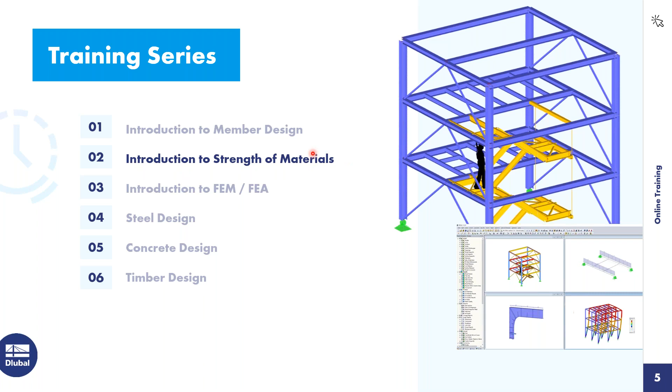Our training series consists of 6 different topics. Today we have the second part, the introduction to the strength of materials. What can you expect today? First of all, you will get an introduction to RSECTION.

RSECTION is our cross-section standalone program for the creation and calculation of user-defined and any different cross-section and profiles. You can calculate thin wall profiles and also massive profiles. This is a huge advantage, that you need only one cross-section program in order to calculate various and different profiles and cross-sections, it doesn't matter if they are thin-walled or massive cross-sections.

Then we do together a kind of introductory example. We will model together a thin-walled I profile, and there we also see the calculated cross-section properties. We will also do a kind of cross-section classification and also apply some loads in order to see different results like bending, stresses, and so on.

Then I will forward later on to Bastian. He will do the 3 other examples, also on a thin walled profile, then also a massive cross-section according to the FE analysis, and then also a hybrid cross-section.

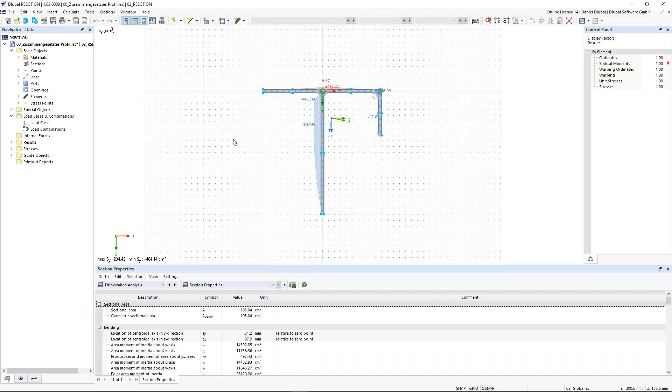With RSECTION, you can calculate all possible cross-section properties like sectional area, area moment of inertia, shear moments, statical moments, and so on. You can also get the centroid and so on. Moreover, you can perform cross-section classifications, and you can also consider effective cross-sections or effective widths of thin-walled cross sections. So: cross-section properties, cross-section classifications, and last but not least, you can also perform stress analysis or stress proofs. Okay, so much to RSECTION.

Now I will explain a little bit about the user interface. On the top, you find the menu bar. Similar to RFEM, you can create here the file menu, a new model, you can save it, you can print, you can create the printout report, you can import some DXF files. So when you're working, for example, with AutoCAD, you can import it. You can edit some objects, manipulate them, adjust them, edit them, and so on.

You also have the possibility to set some views like the console, script manager, tables, and so on. You can insert different and various kinds of objects like nodes, points, lines, parts, and so on. Also calculate tools - tools is a quite important part here in RSECTION, because we will use these two commands: create angled corner, create round corner.

These are pretty important. On top of that, the classical options - when I go here to program options, and since we are today an international group of students, you have always the possibility to change the language you would like to have. So when you are from Spain or you are a Spanish speaker, you can change the language to Spanish, for example. And you can also change the display properties.

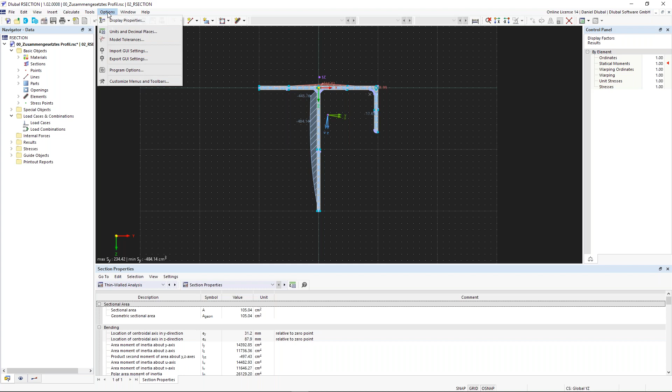So when you want to work in a black background, you can change it here to load dark background. And I click on OK, and then you have this black background or dark background. But I prefer the white background, so I will change it back to white background, and so on. Okay, so much to the menu bar.

Then we have also the symbol bar. It's a fast access to the most important functions and commands, like the creation of lines or points or also new elements. Then we have here the navigator on the left side.

The navigator is divided into 3 parts: we have the data navigator, we have the display navigator, and when we have results, then we also have the result navigator. The first navigator is the data navigator. This navigator is a kind of organization of all model objects, model data, also internal forces, results, load cases, and combinations.

You can create different objects per dialog, like a point - you go here to new point, or you can also edit them. It is structured in a kind of tree structure, so when I open this arrow, all existing points appear there, and this makes it quite easy to see which kind of points, in this case, you have already modeled. Okay, so much to the data navigator.

When you have, for example, some blue objects, that happens because the object or material isn't assigned to any other object. And when you have a red object, it means there's a false definition of this object, for example. But you will see it later, or maybe also at Bastian's examples.

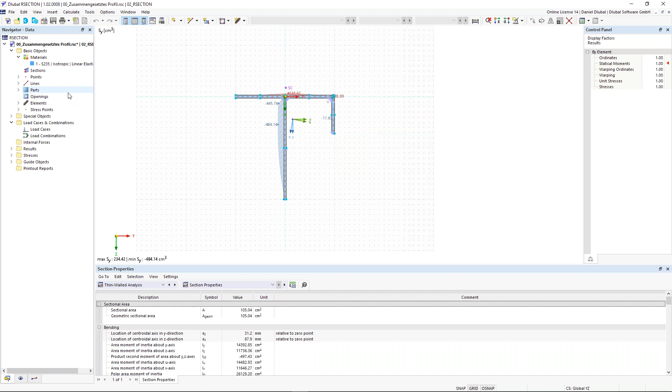Okay, the next navigator is the display navigator. Similar to RFEM 6, I can hide or activate different display properties. For example, I would like to activate the numbering, so I see here the numbering of points, lines, and so on. I can hide the results, I can activate them, also the points, and so on.

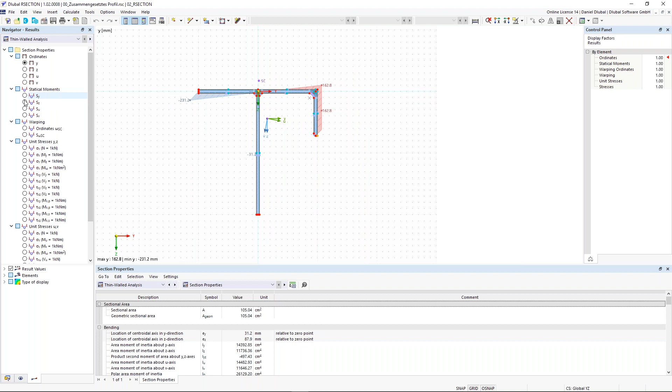And the last navigator is the result navigator. Here I can access the results graphically. In this case, I want to show the statical moments, for example. I activate them by clicking on them, and I see it here at the working area. Here, the statical moment - I have various options to control the display of these results.

I can say the type of display should be ISO bands, ISO lines, or just an easy distribution of this result. I can also say, okay, I will tilt this thing, without diagram, two colored, and so on. I have here various options regarding the display option of these results.

Here in this upper part of the result navigator, I can also activate the unit stresses and so on. And then here we have also the tables.

The tables are also very important because here we can also control and access all basic objects. So we have here an overview similar to the data navigator. We can also create and edit here in the tables different objects and also the load cases and so on.

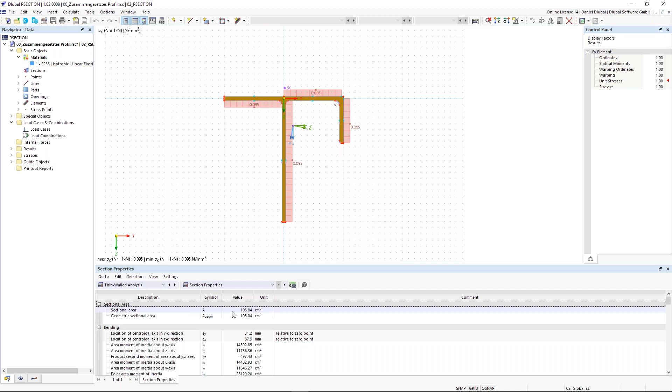And we can see here the results of the analysis of this section. So we see here, for example, the sectional area, so square centimeter 105, then also some other cross-section properties like the bending, so the centroid relative to the 0 point. 0 point is here, and also kind of area moment of inertia and so on.

Okay, so this was, I would say, the rough introduction to RSECTION and its user interface. Now I hope that you paid attention because I have prepared a poll for you.

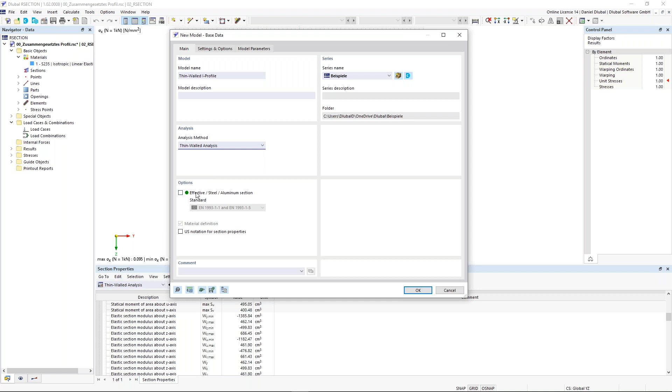The option effective section I don't activate for the first. At first, we will activate this afterwards, and I will explain you also afterwards what it means when I have activated this effective section. So then I click on OK.

And I will do a very easy I profile. It's an IPE 300, but for easier things, I will neglect the radius, so we don't do a kind of roll section. We will do this later on. So at first, we create here a kind of new element.

This element is also used for the cross classification later on. I will use here a new material. For those who don't have here a material, no problem. You can create here a new material. Just click here on create new material.

And a new window appears with a kind of new material dialog. And there you have the possibility to open the material library, and you can search for the steel S355. Then you have the possibility to choose one of these things. I will decide here for this Eurocode, European Union S355, and I click on OK.

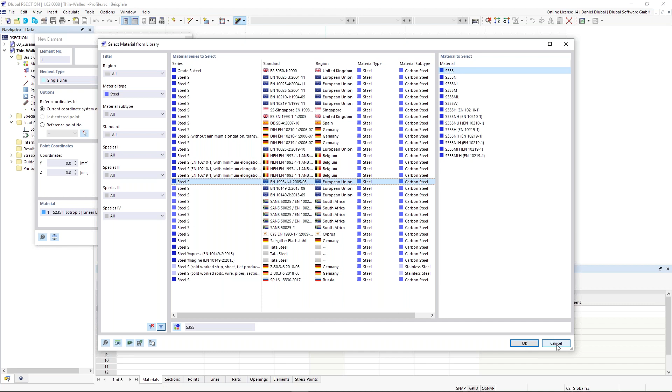But I have already done this before, so I click here on cancel, but you should click here on OK. Then this material will appear here. Okay, for our example, I will use here this S355. And now we do the first element of this I-profile, and in this case, the bottom flange. So this has a length of, let me check, 150 millimeters and a thickness of 10.7 millimeters.

And I will create it here at the 0 point local coordinate system. I click here on OK. And then we create the web.

The web has a length of 289.3 millimeters and a thickness of 7.1 millimeters. And the angle in the work plane is 90 degrees. Now I change the orientation, so I can snap here the middle point of this element. I click on OK. And now I do the same for the upper flange.

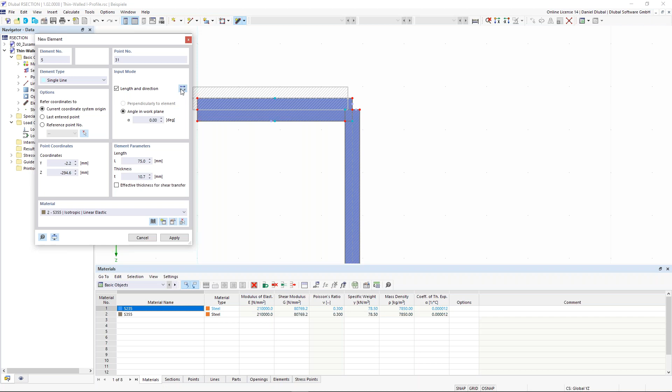Again, here I have a length of 75 millimeters, thickness of 10.7 millimeters, and direction is here. And then I change again the orientation. And now I have here my cross section.

So I have here my cross section, and yeah, the next thing is just calculating it, and then let's take a look together on the results. So for the calculation of this cross section, I go here to calculate, say calculate all, and I see here

the cross section properties. First of all, the ordinates, the y, z ordinates. I can see them here as colored results. For me, it's interesting to see the cross-section properties. In this case, the sectional area. I have here this one, 51 square centimeter.

Then I scroll a little bit down to the other results. I see here the centroid, so relative to the 0 point, the 0 point is here. And as you can see, okay, the y coordinate is 75 millimeters because we have here this I-profile, which is symmetric in both directions.

Okay, good. Yeah, and then we have also all other results like the statical moment. We have the elastic section module about the strong and the weak axis. This is important for the calculation, maybe for the bending capacity of different steel profiles. Then we have also here some information about shear, so the shear area.

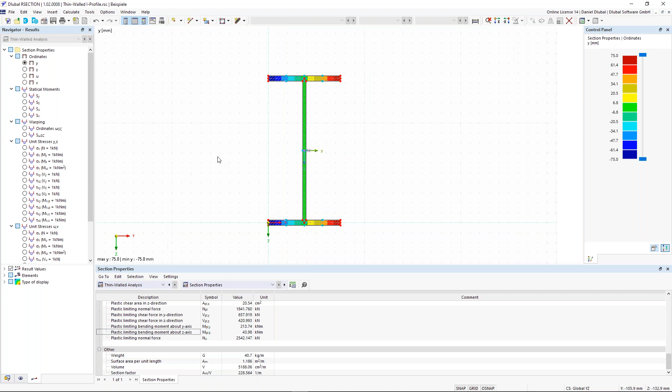So the plastic section modules about the y-axis, and also here this plastic limiting bending moment about the y-axis and also the z-axis. And also important for you, the self weight, so per meter, also pretty interesting to see it, and so on. So what can be also pretty interesting, the statical moments of that.

This kind of display isn't so good, so I would put here this one, and maybe in order to have it similar like your hand calculation, I would activate here this tilting of result diagrams, and then you see it here like that. You see also here this shear distribution with the arrows. For a kind of better display of the results, you can also deactivate here the parts and also the elements, and then you see the results a little bit better. It's up to you how you would like to do that.

And yeah, this was a very easy and general example. When you do some hand calculations yourself for your study, or have some easy examples, you can always refer to RSECTION. There you can enter and create this cross-section, and then compare the results to your hand calculations.

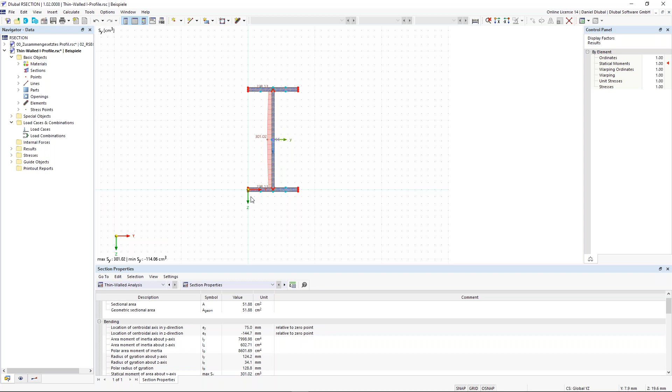If the cross-section properties are the same as in your hand calculation, okay. Now we will edit this cross-section a little bit, so I will deactivate the results here, and now imagine that we do this cross-section. This upper part is like a T-profile, a rolled cross-section, so we need a radius here, and the bottom flange we would like to weld onto the web. So we will add some weldings, some fillet weldings.

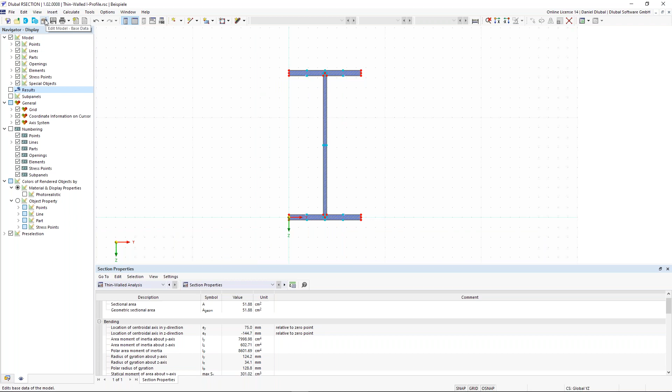Let's start with the cross classification, because now I want to consider cross-section classification for a steel profile according to Eurocode 3. Eurocode 3 has 4 different cross-section classes, and we can also do this classification with RSECTION. I go to the base data and activate the option effective steel aluminum section. This allows me to perform a cross-section classification, so I will see which elements or C parts are responsible for that cross-section class. This is pretty interesting, and I will activate it.

The next thing is that we will show the sub panels, and as you can see, these sub panels are the C elements for doing this cross-section classification. You can do this also by hand, but RSECTION considers it automatically. This is important for performing the cross-section classification.

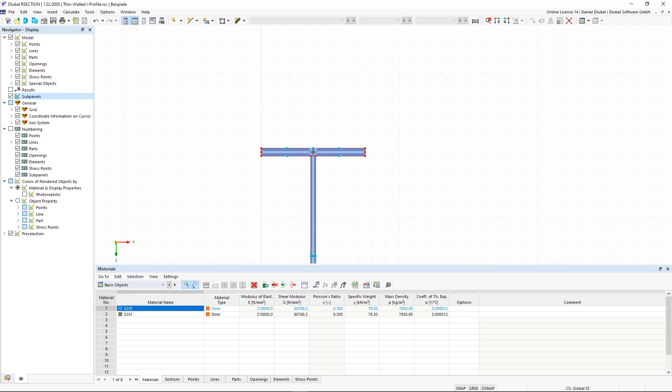Now we will add here these radius. So therefore we go to tools, and I will create a round corner. I go to the round corner and enter a value of 15 millimeters. I choose this line and this line, and then you can also see that the sub panels are fitted to the outer points of this radius.

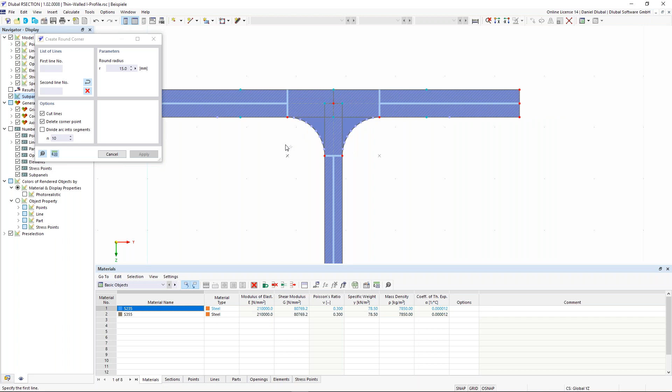Let's do the same for the right side, and you can see how they change depending on the end of this radius, because this will affect also the cross-section classification. So right click, I will end this dialog.

Now we will do the next part. Here we will add an angled corner. So I go again to tools, create angled corner. And now I choose here the corner type edge and angle, and I can insert here also a kind of formula.

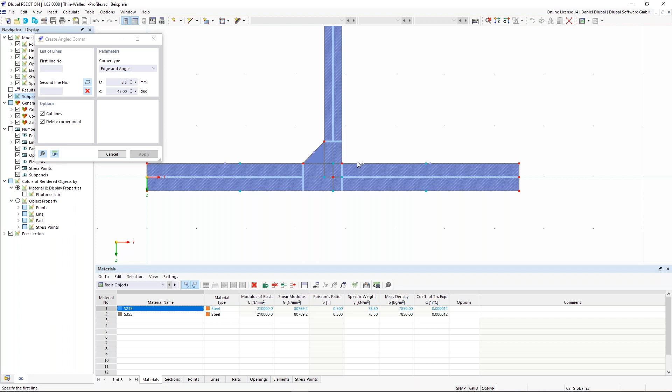The edge length should be 6 millimeters times the square root of 2, because we will consider a degree of 45 degrees. So I enter SQRT for square root with braces, and in the braces I put 2, then jump to the next box and the length is calculated automatically. And the degree is 45 degrees. Then I choose both lines, this one and this one, and again you see the sub panels are changed. We do this on the right side too.

So much to that. Now, in order to perform this cross-section classification, you will also need some internal forces, normal forces, bending moments, because then the cross-section classification is complete.

So I go to the data navigator, and you can see here I have the possibility to create load cases and also to add internal forces to the load cases. Let's do that. I will create 2 load cases, so I click right click, new load case. The first load case should consider only normal forces.

So I enter here only N for normal forces. I copy the whole thing, and here only bending moments. Then I jump to the next register, the load combination, and there I create a load combination where all load cases are considered in one bigger load case, but only with these kind of factors. This is completely fine, and I click OK.

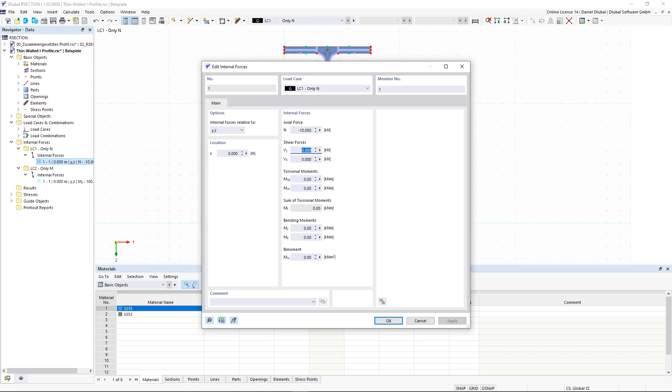Some of your exam tasks require stress nodes at a specific location. Normally in our section a lot of different nodes or points are given, these are so-called stress points. Here you can see different values or results for the stress at that location. When you want a result at a specific location, you can also add user-defined stress points.

This can be done at stress points in the data navigator. Right click and say new stress point. To find our stress point fast, I give it point number 100, and refer the y coordinate to the middle point of this bottom flank, and the z coordinate should be minus 100 millimeter, minus because we go against the global z coordinate. I click OK, and here's our stress point number 100. Perfect, so much to that.

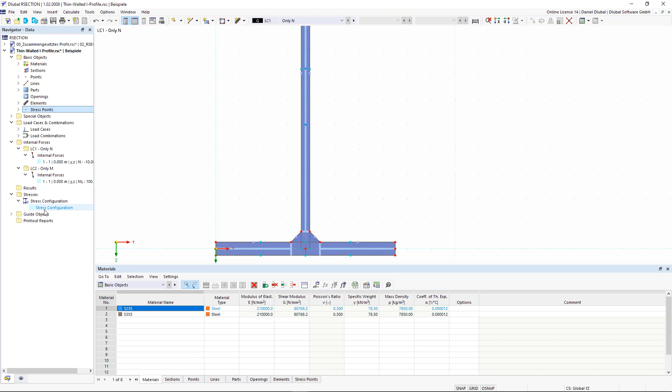Now let's go to stresses. You have the possibility, when considering stress analysis, to adjust your stress configuration. Just right click or double click and go to edit, and then you can activate various stress types, like normal stress due to axial force, both tensile and compressive, or for bending around the local y-axis.

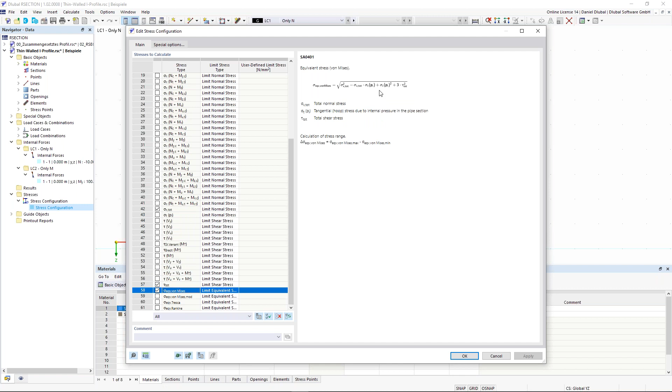In standard cases, 3 stress types are already activated: the total normal stress according to this formula, the limit shear stress, and the equivalent stresses according to Mises or von Mises. I will leave it like that, you can adjust it on your own needs. I click on OK.

The only thing we have to do now is go to the menu bar, calculate, click on calculate all, and then go through the results. First of all, I see this thin wall analysis, and because we activated before in the base data the option with the effective thin wall analysis, we see this other analysis too. This normal thin wall analysis is suited for easy cross-section properties.

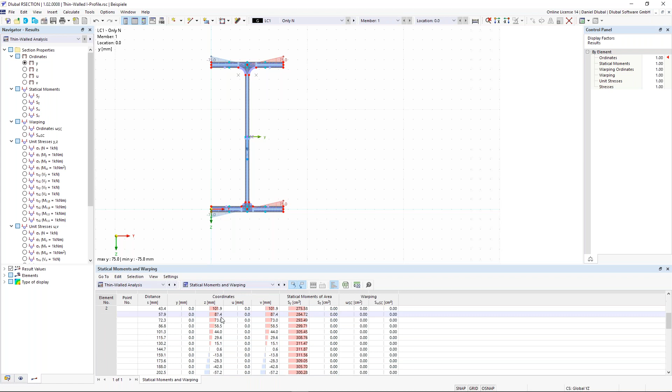So I go again to the thin wall analysis, and I can see the section properties, the statical moments, also unit stresses, and the normal stresses. Then you see here also the stress ratio according to the selected load cases and load combination.

This is also pretty interesting, here the different stress type. When we are interested in the stress ratio for our set stress point, I go to stresses by stress point. I click on our stress point, and now you see the stress ratio for our user-defined stress point. So much to the thin walled analysis.

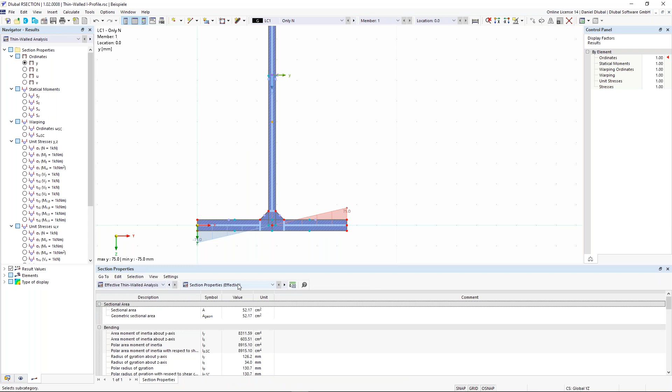Now let's jump to the effective thin walled analysis. Now it becomes interesting because you can see we have a sectional area of 52, and also that we have an empty part of this section, because now the program considers, according to the cross-section classification, only the effective section properties. So there we have a part which isn't effective, and this is also not considered in the whole calculation of the section properties.

Okay, now let's go to the section classification. This is pretty important when doing cross-section classification according to Eurocode 3 with steel profiles. Here you see we have class 4. Why do we have class 4?

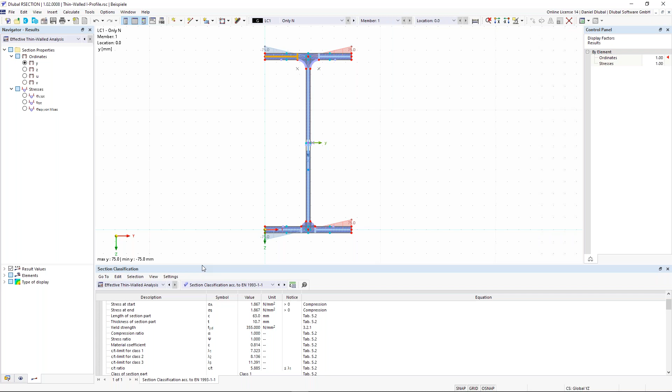Because every subpanel is analyzed by its own classification or cross-section class. So for the flank we have one class, but for the web we have other classes, in this case class 4. And normally the highest class is the final class for the cross-section, so in this case class 4.

You can also take a closer look at how the whole analysis is performed. You have here this material coefficient, this is because of our material S355. Then you have these different c/t limits for class 1, 2, 3. When this c/t ratio of the web or subpanel is larger than lambda 3, you are automatically in class 4, and this class 4 is the class which will be activated or considered as the highest class. Always the highest class is responsible for the correct cross-section class.

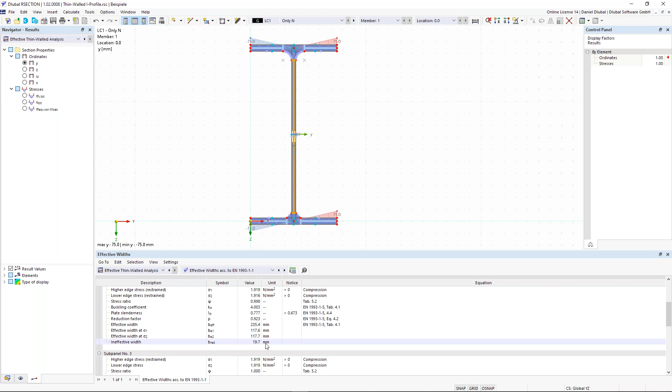Okay, so much to that. Then you have also these effective widths. When I take a closer look at subpanel 1, you see there's no ineffective width. But when I activate subpanel 2, I see an ineffective width of 19 millimeters, and this is the empty width or empty part of this cross section.

And then also the stresses. You can see here load case 1 with only normal forces. You can see, because we have very low normal forces, a very low stress ratio, and with bending, and then as combination.

I have prepared a poll for you that will summarize a little bit what we have done in this chapter. I will launch it.

Okay, I will close this poll and share the results. So all 3 answers are correct. In order to carry out a cross-section classification, you need at first the internal forces, like bending moments or normal forces. Then you also need to activate the option in the base effective section. And on top of that, you have also to have subpanels in the part.

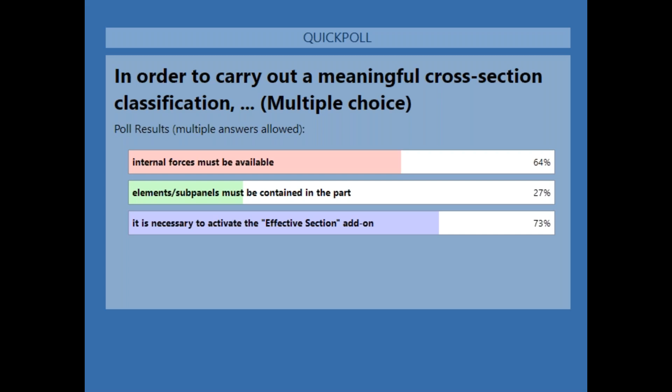So maybe, what are subpanels? Subpanels are these kind of, maybe bones, or kind of elements here, this one. They are done automatically, and it's important to have elements. Element is, for example, this thing, the right part of this flange. This is an element, and these elements consist of subpanels, and these subpanels are important for the cross-section classification.

And the elements must be part of a part, and the part is this surface, this one. Okay, good, so much to that. And now I would forward to Bastian.

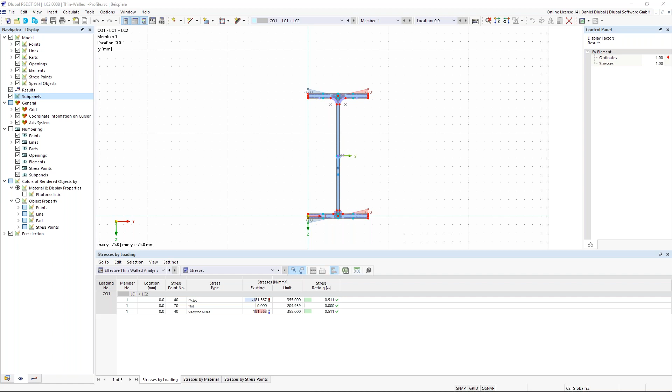Okay, thank you, Daniel. All right, thank you, Daniel, for the introduction and the first example. Then I go on with the next example. By the way, there were no questions, so very good explained, I think, very detailed.

Yes, and I go on with the next example that is also a thin-walled one. So it's an asymmetrical one, a standardized L section extended by 2 elements, one horizontal and one vertical. You will see this in a minute.

So the first thing I do is I am here in RSECTION and open a new model via the symbol bar. New model, and I give it the name thin-walled cross-section.

Of course, the analysis, as you can see according to the name, will be thin-walled analysis, because as Daniel already explained, we are considering linear thin-walled elements, which are linear and better to calculate with this analysis. We also activate the effective sections according to this norm and confirm with OK.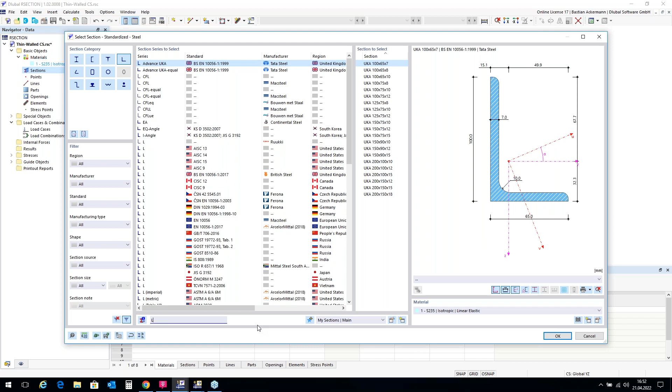There I have all available L sections. I can filter them here on the left side according to region, manufacturer, and so on, or I can just search it in this bar down here. So it's an L, I type it in: L space 200, 150, 12. And then I choose this one from the German annex.

Yes, and I could also change the material here if I would have forgotten it, for example, but it's not necessary. So I confirm with OK.

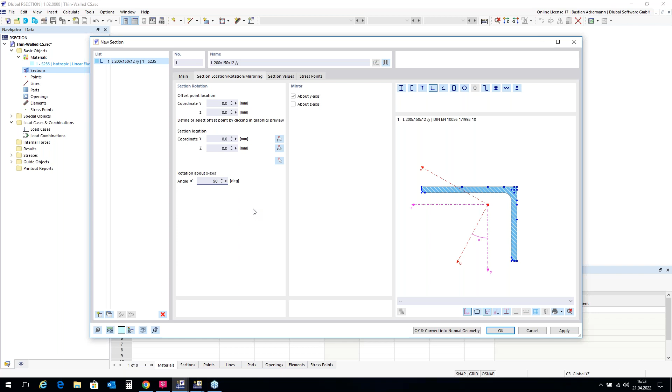And then I'm back in this dialog box here, in this register section, location, rotation, mirroring. And there I can mirror this section about the y-axis in this case, and I want to rotate it about 90 degrees like this. And then I choose the fixed point, which should be here in the center on the left side, on the left flange.

And there I can see the local coordinates here on the left side. And when I want to insert it into my working plane in the global coordinate system, I can also choose the coordinates here, which are already correct, but I can show you by picking them in my working plane with this button here. So I click on that and choose this coordinate origin and then confirm with OK.

So there's my L section, my L profile, and it's also possible to create this manually by drawing lines or elements and angled corners like here, rounded corners I mean, but it's also possible to choose the standardized ones directly.

Now, as you can see, our section automatically recognizes elements here. Here you can see the arrows. There are already existing objects for each one. So here we have 2 elements. So our section already recognizes 2 thin-walled elements here, and they are automatically assigned to subpanels.

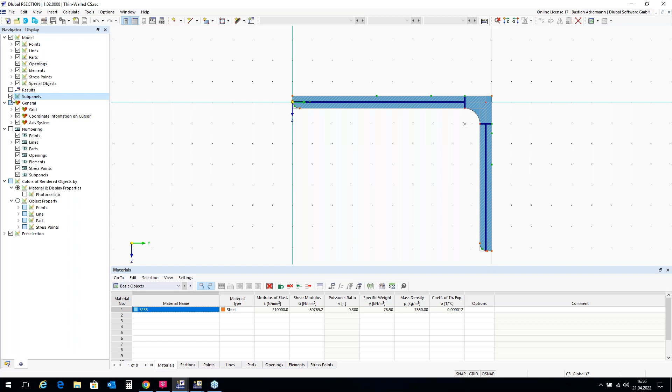Then, of course, we also have a part, and for these elements I switch the subpanels off again. These elements automatically have to lay within a part. A part is necessary to have a final cross section. So our section has automatically recognized this one here. This is a part, meaning it looks like a surface in RFEM, if you know RFEM from RFEM 5 or RFEM 6. This is like a surface, so the whole section finally.

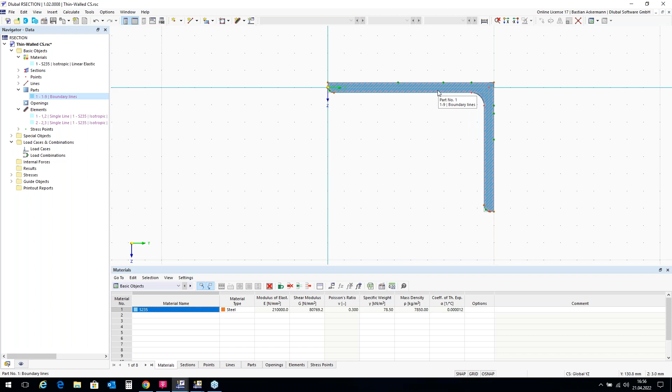Yes, okay, so as I mentioned, we want to extend this cross section here on the left side by one element horizontally and one vertically. So in order to do that, I have to create a normal geometry and divide this profile into single elements.

I do this by right mouse button click onto the element, and then I choose section, and convert into normal geometry. So I have single elements now, and now I'm able to edit this cross section.

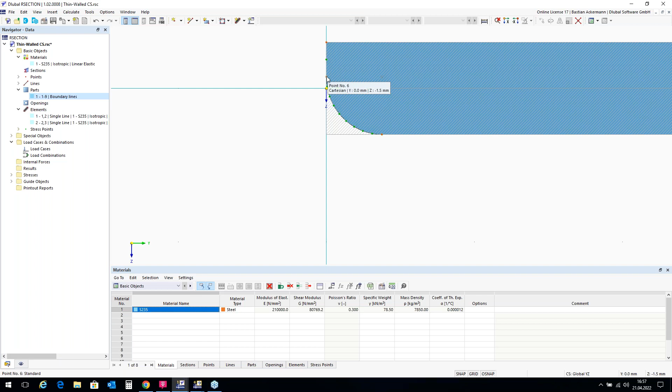Before we go on, we check this option here. This is deactivated auto split elements, which is important now because I want to move away this rounded corner. I do this by deleting this point here, point number 6, I delete it.

And then you just see the elements which are not closed. So they are shown in red. Red means it's not a full cross section, not ready to calculate. If I switch the elements off in the display navigator, you can see it here. But that's all right for now because I want to go on and extend my cross section.

So the next thing I do is I draw another element. I can do that by the data navigator here over new element, or by the symbol bar, new element, single element, and then I get this dialog box. I choose the input mode length and direction, and the length of the next element is 200 millimeters and thickness 12 millimeters.

And now I could draw it, but I want to change the orientation or reverse it. And now it's correct. So at this point, I want to put the next element.

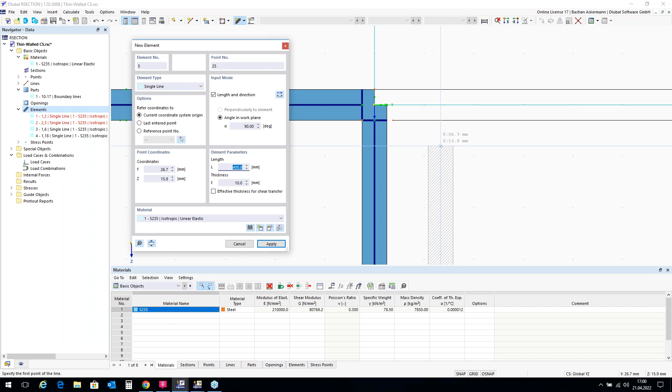I click it and RSECTION automatically recognizes the sub-panels here, that they start at this point. Now I can leave this mode by clicking the right mouse button, and then I switch the panels off again.

Now I want to define some fillet welds here in the corner. I do this by tools, create angled corners. The corner type shall be edge and angle, and the length is 6 times square root of 2, so 8.5 again, and an angle of 45 degrees.

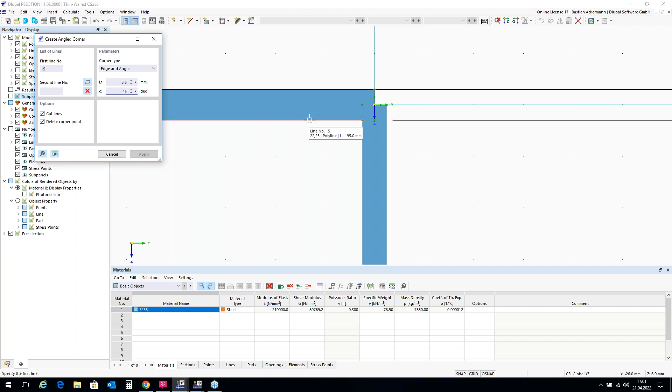And now I can just pick the corresponding lines here, and on the other side. All right, now I leave that function with a right mouse button click, and obviously I could create the whole cross section now, because the boundary lines seem to be closed.

If that's the case, I can switch to my data navigator, and I can click on this part here. The part is still red because the lines which are saved are not the correct ones.

So I select the correct boundary lines now with this mouse button here. First I can clear the selected objects, and now select all of them and confirm with OK. And again, OK. The boundary lines are not closed. So I will take a look at this.

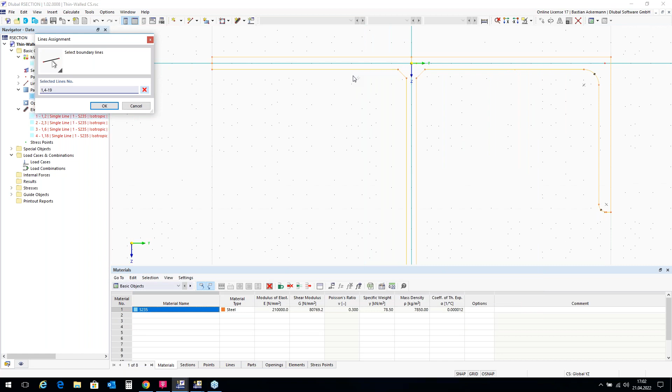Here is another one which is not used, or not necessary, so I can press Shift in order to deselect it. Shift, and now it should work. So the Shift key with the arrow to the top, then press OK, and OK again.

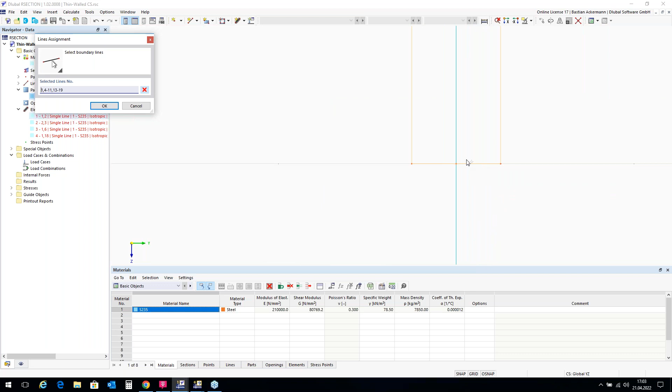Okay, they are still not closed. So I check again. This is all closed.

Yes. Yeah, I think there's also another line at the 0 local coordinate. I believe that this was still activated when you selected all. This one here. Yeah, exactly. Yeah, can be. Yes, thank you, Daniel.

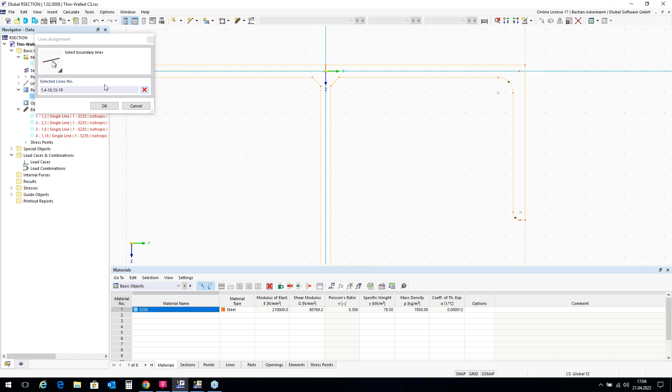Okay, so I go back into this dialog box, select all boundary lines, clear this field, and now again, and now I press Shift, and yes, both are shown in black, so not selected, and now it should work. Okay, and okay. Yes, now my cross section is ready to calculate.

And yes, you can see the subpanels here. This cross section. Now I can save it and import it into RFEM or RSTAB if I want to.

But now we want to give it a load, so some internal forces. We do this with this button, load cases and combinations. So first load case is N for normal force, and the second load case is M, bending moment, and a load combination as well, both of them, N and M. I confirm this with OK.

And now I have in my data navigator internal forces. There I have my load cases, which are still empty. Under load case 1, I double click on internal forces. I can also give more than one internal force, but in this case only N, that is minus 50 kilonewton. And I confirm that with OK.

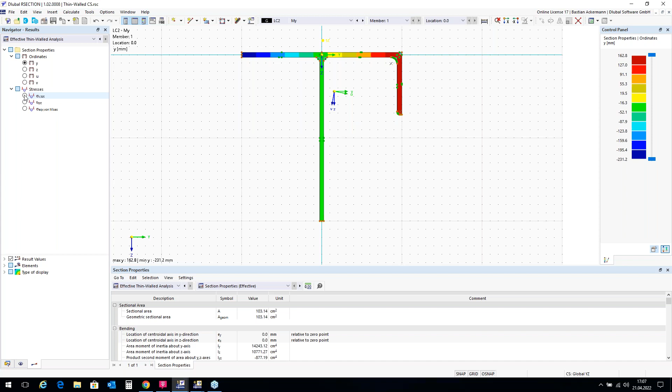So we want to do a cross-section classification. And first we see our ordinates here and the stresses. Let's go to the, but first of all, we have an asymmetrical cross-section here.

So the shear center is not the same as the gravitation center. You can see this here also under the thin-walled analysis section properties. If I scroll down here, you see the coordinates of the shear center here, for example.

And then if I go to the stresses, sigma x total, for example, there I can see my effective cross-section now according to the bending moment, which is shown here in this bar.

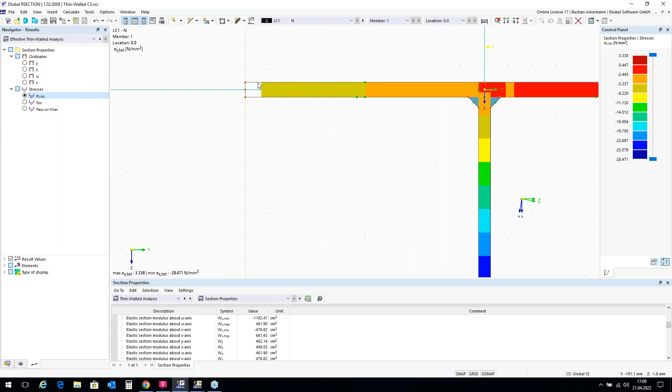If I switch to the normal force first, for example, I see this field is empty here and also the whole part down here, because everything, the whole section gets pressure in this case, a normal force of minus 50 kilonewton pressure. So this part of the subpanel down here will be buckling, and it's not carrying the normal force in this case. So it's not considered here within the effective cross section, and the same applies for this little part here on the left side.

And for the bending moment, it's the same in the upper part, but down here we have tension because of the bending moment, compression in the upper part, tension in the lower part, and that's why this part of the section is important for the bending moment. And for both of them, it's also this one.

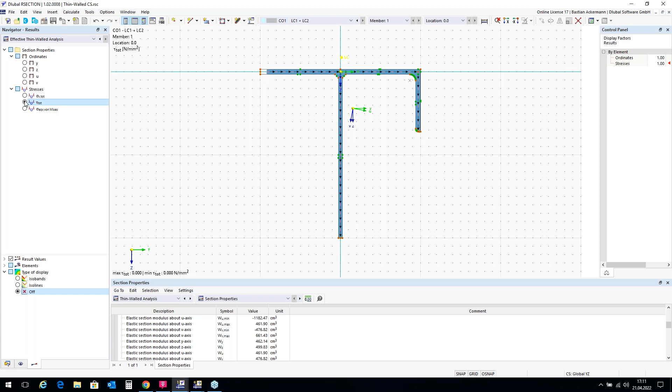When we see the results here, we always have to watch the control panel on the right side, which is the legend for this. But if I want to see a graphic or the values directly, I can switch the type of display from isobands to isolines, which is not so good in this case, or switch it off to see the values directly in the graphic, for example for sigma x total like that, or for tau like this.

Finally, I want to print this graphic into my documentation and then show you the documentation. So we go over the symbol bar and print graphics, or we go over this button and say print graphics, to print out report.

Then we have this window and can do some settings on the left side. But now we leave it like this and click Save and Show.

We can give the name here: protocol thin-walled cross-section, TW, thin-walled cross-section. And here we can activate or deactivate additional items on the left side, and then confirm it with OK.

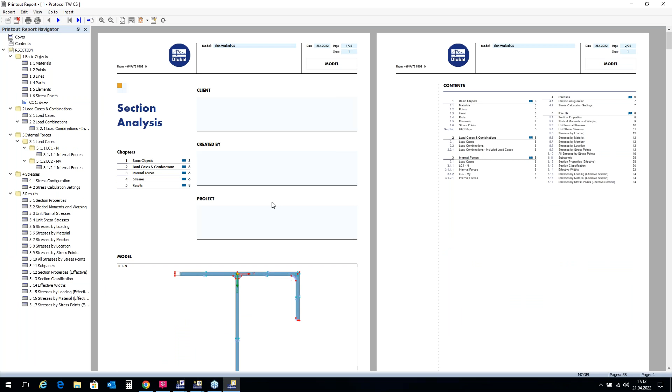Then we wait so our printout report can open. And now we have here the documentation of our section analysis. So first we see the model, and then on the left side our printout report navigator, where we can switch into the chapter we want, or scroll down. And here you see the symbol for graphic. There we can see our graphic, which we printed into our report.

We can also edit the printout report here and deactivate items or activate additional ones. For now, this is okay so far, so I can cancel that and close the printout report.

Now I save this cross-section because it's ready for RFEM, ready to calculate and to design it. So I say save as thin-walled cross-section.

And before we go to the next example, we go to the poll, which is actually a statement that the analysis of thin-walled structures is suitable for the calculation of rolled or parametrized steel sections. I start this, and now you should see it and be able to choose right or wrong.

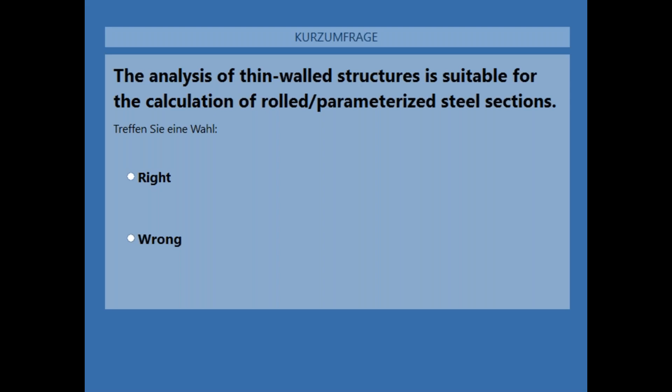Of course, this statement is right, so everyone who voted correctly is right. Yes, the analysis of thin-walled cross-sections is there to calculate parametrized or rolled cross-sections.

If there are no questions, I would go to the next example, and close this one.

So the next one will be an aluminum profile, which can be considered as a massive one. You will see it in a minute. We calculated with the finite element method because we have no regular thin-walled elements here. So mostly this can be concrete or timber cross sections, but it always relates to the whole size of the cross section, so you consider the thin-walled analysis or the finite element analysis. I will show you what I mean.

I click on new model again, and aluminium profile is the name. You cannot model it along with me now, because I have a DXF file which you don't have, so you can just watch, but that's all right.

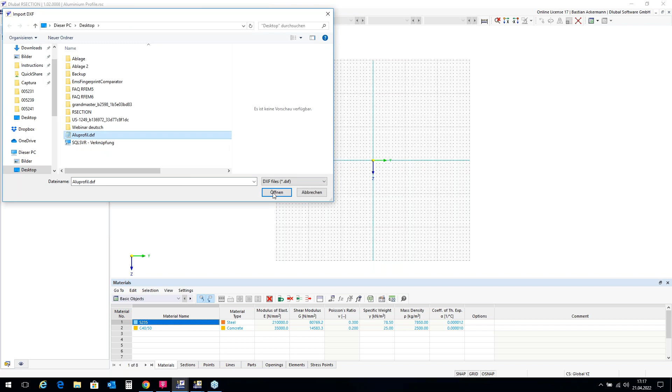So the analysis method is the finite element analysis, as I already said, and in this case we don't need a classification of sections. So I confirm this with OK, and then I import my DXF file over the menu bar: File, Import DXF, Alu Profile, open it.

So as you can see, you are not always required to draw your sections. You can also import it from DXF files, for example. After clicking import, you can see this dialog box and choose the point and rotation, and if necessary also a coordinate system transformation. We leave it like this and confirm with OK. Confirm this also with OK, and then you see the file.

So actually only lines.

This is not ready yet, not finally a cross section. I have to define a part for that, as I mentioned before. You can also draw these lines using the function in the symbol bar, but it's also possible to import a DXF file easily.

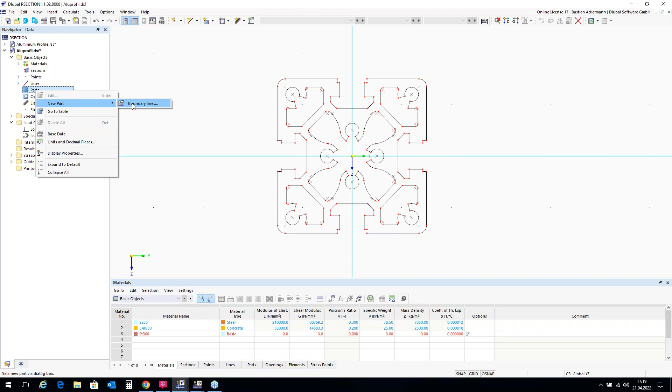So the first thing I do is click with the right mouse button on parts and define a new part over boundary lines. Now I'm in this dialog box, and I forgot this - I need to create the new material, it should be aluminium, not steel and not concrete. I can do this over the dialog box, new part, using the button import new material from material library. I know exactly which material I want, so I search it in the bar down here.

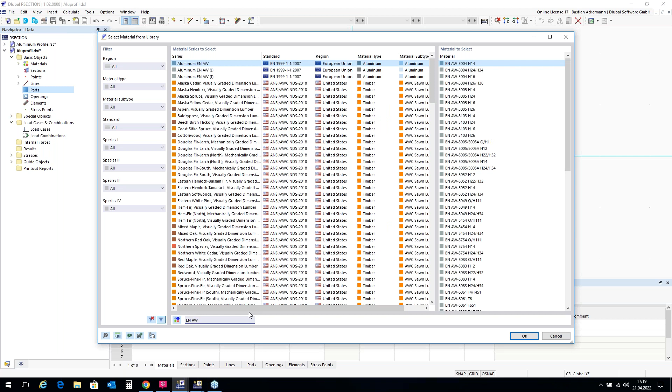EN AW 6060, and then I have this one here, 6060 EP T66. Double click on it, and then I have my material here.

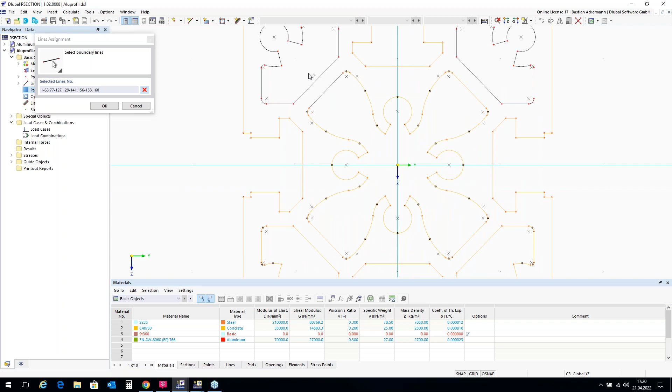Then I select the boundary lines with this button. I select all of them, and now I have to deselect the inner ones. I press Shift again, zoom a little so I can do it easier, press Shift and deselect this one, this one, this one, and the last one. Then I confirm with OK. And now again OK, and now you see the outline of the profile.

The next step will be to define openings here. And before I say something else about the method, I'll do this. I click on openings here to create them.

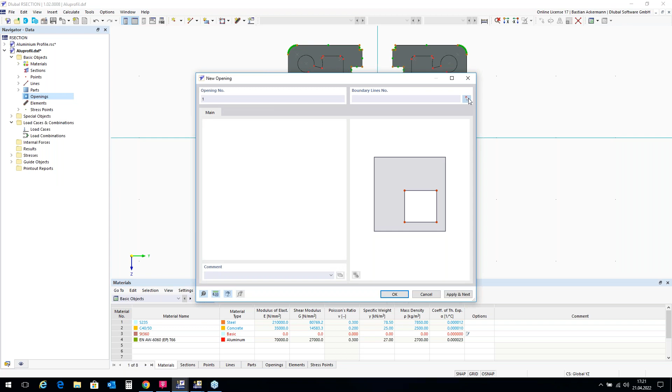Right mouse button click, new opening, and then I can directly choose the boundary lines for my first opening. It's this one. Deselect this one with Shift, and then I press OK, and OK again, and I have my opening here.

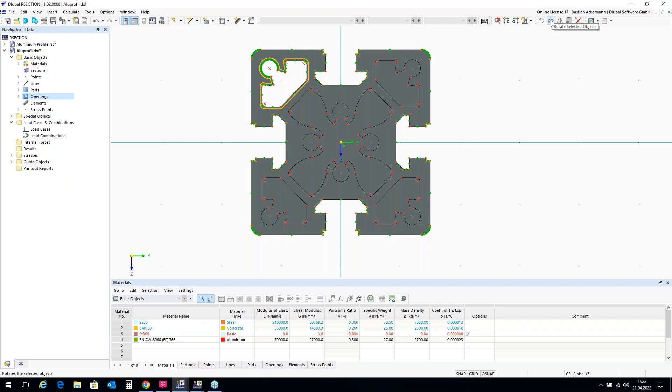Now I could do this again three times, but I'll show you another function which is also possible. I want to rotate this opening and copy it. So I select it first by clicking on it here, so that it's selected, and then I can use the function rotate selected objects in the symbol bar. Rotate copy - I activate create copy and say 3 times. Rotation angle is 90 degrees. The point of rotation is already correct, but I make sure over this button - of course, the center. And then I confirm with OK again.

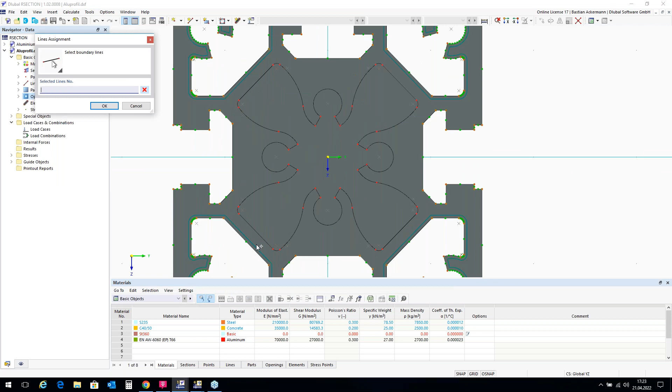And then you see all the openings, and finally one in the middle I have to do manually. New opening again, select boundary lines, and be careful. Yes, like this - that looks good. Then I can confirm with OK. It has to be closed, of course, all boundary lines. OK again. And then my cross section is ready.

So now you can see, if you wanted the thin-walled analysis with a cross-section classification of elements, it's quite hard to do because I have a quite irregular cross-section here. This could be an element here, but the next ones would be hard to define. So this makes sense - this example is very useful to use the finite element calculation as the method here.

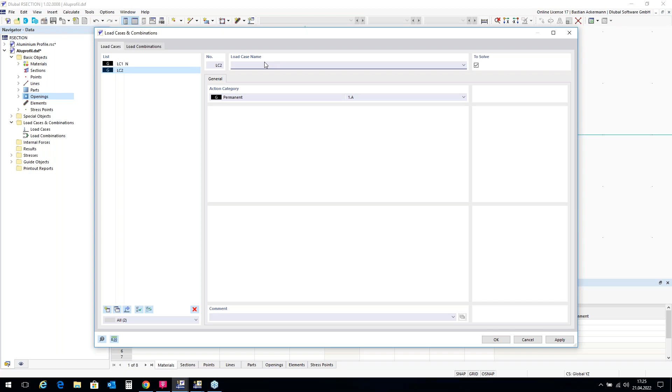So, finally I'll give it some internal forces - one normal force and another load case with torsion, and also a load combination combining both of them, to make it complete.

And as you know, over the data navigator, internal forces: a normal force of -10 kilonewton and a torsional moment of 0.3 kilonewton meter. And then I calculate all.

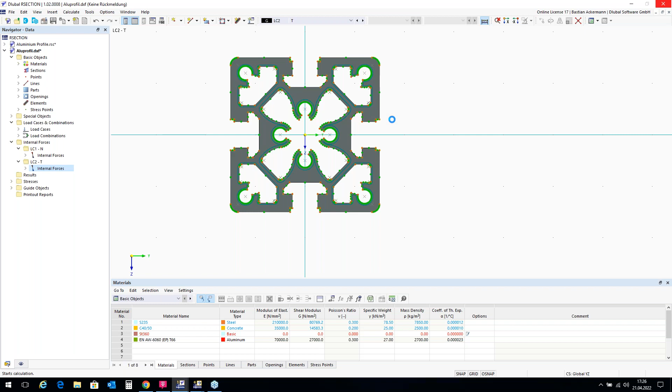Yes, now I have my results here. Again, as you know already, the ordinates and unit stresses, and stresses sigma x in total. Of course nothing for torsion, but for n, here according to the control panel, -6 everywhere.

And yeah, if we can see the combination here, the same, and for tau, the shear stress, this one.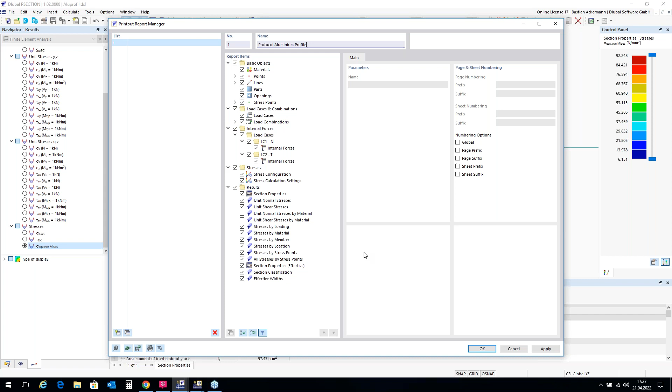The equivalent stress I want to import as a graphic into the printout report over this button again. Save and show. Name is protocol aluminium profile. Confirm this with OK, and then I have my documentation.

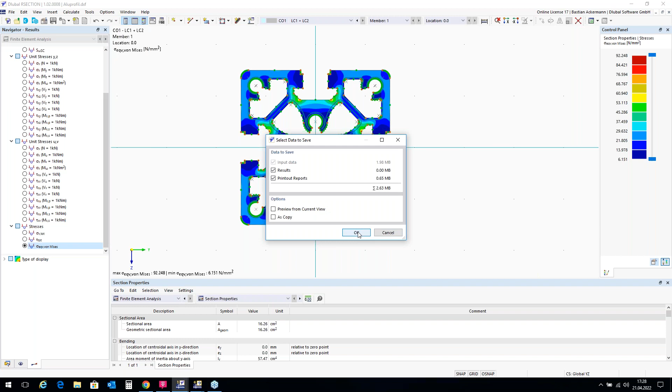Yes, again here my graphic and all other chapters on the left side. I close this again, and now it's ready to calculate as well for RFEM or RSTAB. If I save it, I have to save the file with results, of course. Okay, and yes, I can replace this.

All right, before we come to the last example, we go to the poll again. So again, a statement: the analysis according to the FE method is suitable for massive cross-sections such as concrete or timber. I started - right or wrong again.

Okay. Almost 50% have voted. Okay, I close it. Everybody who has voted, right, so 100% correct. Yeah, there you can see it. So of course it's correct.

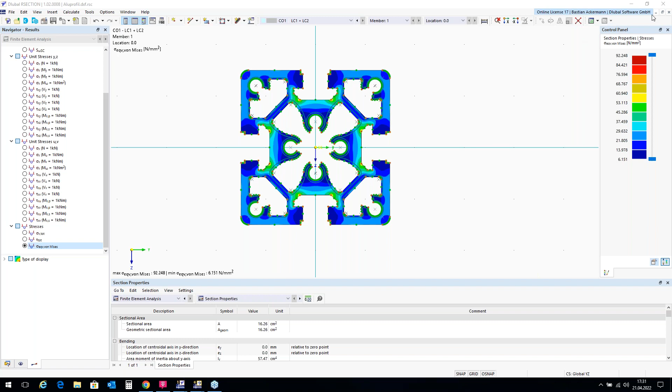Yes, okay. I close this. And yeah, the last example, or I can say it first: it will be a composite beam.

It's also possible in RSECTION to model cross sections as hybrid ones with different materials, and also save them and import them into RFEM or RStab in order to get internal forces. Because as you know, the stiffness of different materials is different, and this has an influence onto the internal forces. So we will look at a concrete slab 1 meter wide and 20 centimeters high, supported by an HEB 400.

So I open a new model and call it composite cross section, and we take the finite element analysis, no effective sections, and confirm with OK.

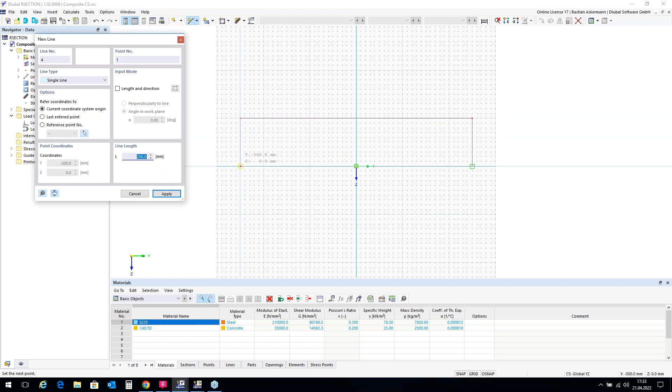So now I draw manually a section for concrete first. I do this with new line, and it shall be 1 meter wide. In order to have it in the center, I start at minus 500 millimeters, go to plus 500 millimeters, then up to minus 200, and back again. I leave the function with right mouse button click two times. Actually, this is the outline of my concrete part.

So I can define the part here easily over right mouse button click, new part, boundary lines. Of course the material, it's already there. If not, I can choose it over the library. We take this one, C40/50, and choose the boundary lines over the button. All of them, confirm with OK, and again OK, and that's it for the concrete part.

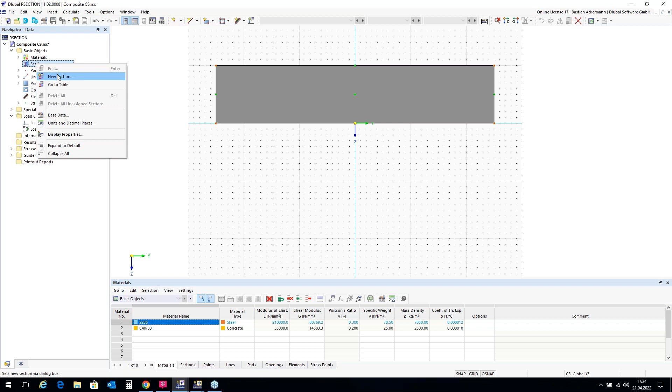For the steel part, or the HEB 400, I go over sections, new section, and choose from the library the parameterized H-beam over this button. I go to this one, Euronorm, and take the HEB 400 here. Material is S235. That's all right, and I can confirm this with OK.

Here I choose my fixed point first, this one here on the top in the middle. Then I can choose it here where I want to place it over this button. It was already the correct one, but like that you can see it. So then I can confirm this with OK. And now it's ready. The cross section is ready to save and import in RFEM or RStab.

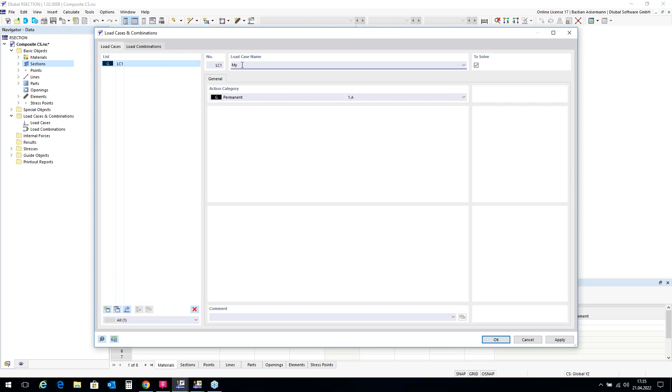In order to control it, I can set or give it a bending moment, confirm with OK, and give it a bending moment of 100 kilonewton meter, confirm with OK, calculate all, and get my results here. Sigma X total: I have compression in the upper part, in the concrete part, for a positive bending moment, and tension in the lower part of the cross section, which is correct.

Yes, so then I can save it. Save as with results, composite cross section. And then I open RFEM in order to make it complete, to show you a quick example, an easy example as a cantilever here. So I open RFEM and open a new model.

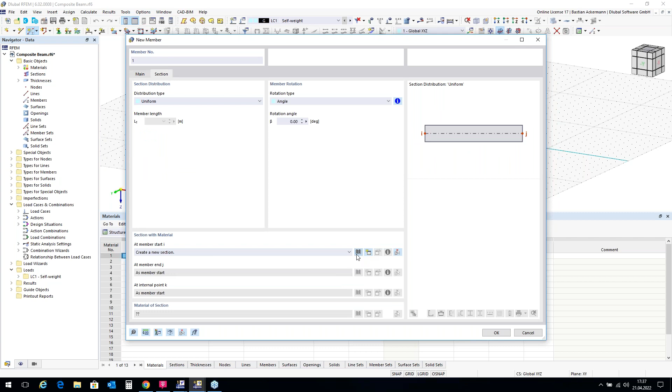Composite beam. Confirm with OK, and then I can draw my member over the button New Single Member. Then I have this dialog box, New Member, Main and Section tab. I go to the Section tab and I have to create a new cross section here.

So I choose the Library button. So far everything is clear. Maybe if you are using RFEM, then I choose the button on the right side from RSECTION, this button here. And then I can choose RSECTION files wherever I have saved it. So this one was the composite cross section, which I wanted to show you.

Of course, I can also import every other RSECTION profile that I have saved. Composite cross section, open it, and then I get this dialog box here, edit section.

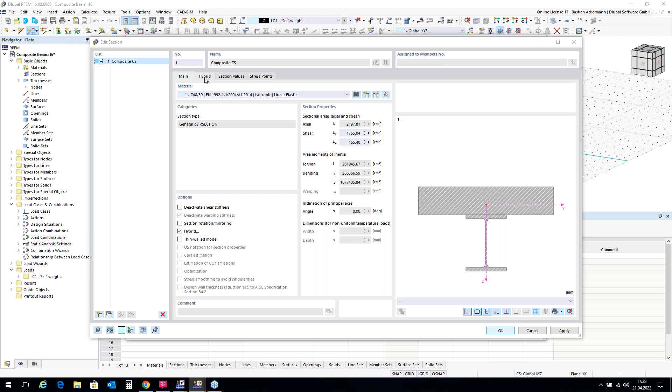There you can see this option here, hybrid, which is already activated. And if it's activated, it has to be, because there are different materials. You go to the tab hybrid, and there you see the different material assignments. So now we have to check it and change it.

The part number 2 is not concrete, but steel. So we change this into S235. If it's not there, we can also define it over the material library, of course. So S235 in yellow, and there we see it. That's correct. Part number 1 is already concrete, and then we can confirm this with OK.

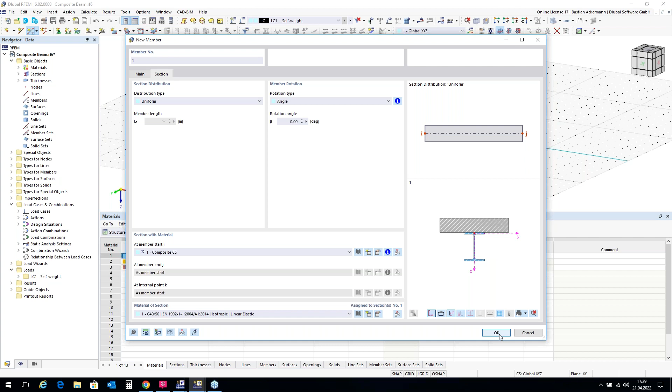Now we defined our cross section here. Again, here you can see it. Then we can confirm this dialog box for new member also, and then we can draw our member.

As I said, only a single easy cantilever here in order to make it complete, with a fixed support. So like that.

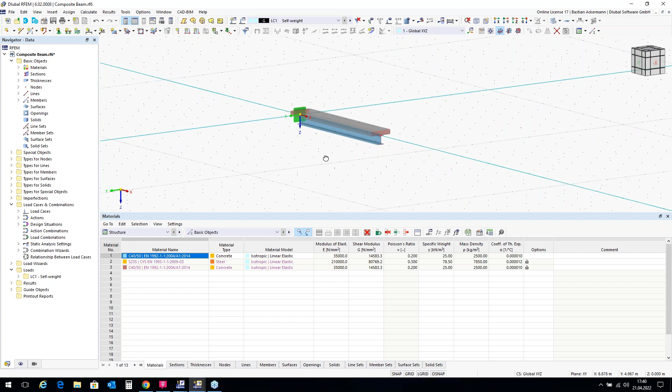And then you can load it and get internal forces for this, where the different materials are considered because of the different stiffnesses. That's it from my side.

If you don't have any questions... there is a question: Why is not the M1, M2 materials already considered when imported the composite section?

Yeah, good question. You mean... one second here, edit. I think you mean here that it's not considered correctly here. Well, to be honest, I have no answer to this now, but I think it's always good to check what you are doing. I think most of the time you don't have many more than 2 different materials in one section, so it's always good to check this.

But I can make a note here to maybe have this as a new required feature, so that we can recognize it directly, if that's possible. I cannot confirm it right now. Yeah, why you need to?